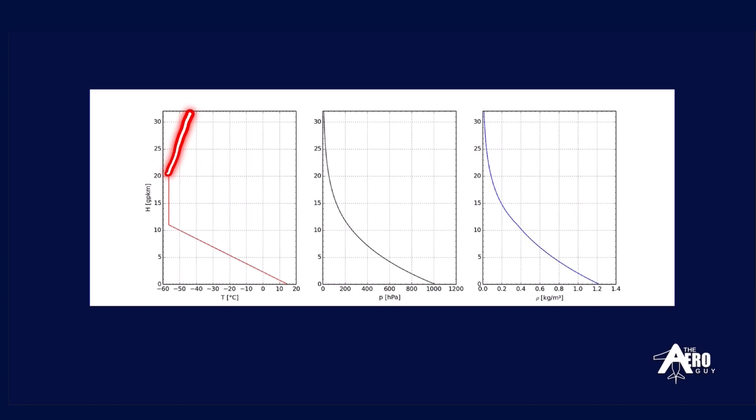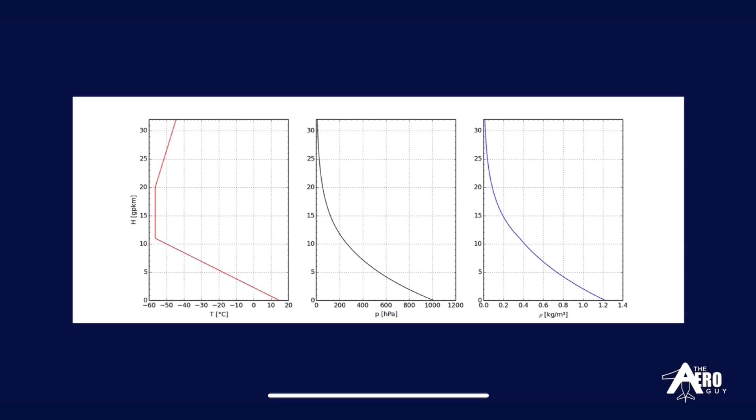Now let's take a look at the overall trend of temperature with altitude. If you analyze the standard atmosphere, you'll notice a distinct pattern with temperature change as altitude changes. At sea level, again, temperature decreases as altitude increases. At around 11 kilometers, temperature becomes constant and remains steady for some distance.

Now beyond this point, temperature starts to increase again, pauses, and then decreases, and then pauses, and then at the last layer, it increases even further. Now we will not discuss the reasons for these temperature changes in this video, as that's another rabbit hole to dive into, but maybe for another time. But just a quick introduction.

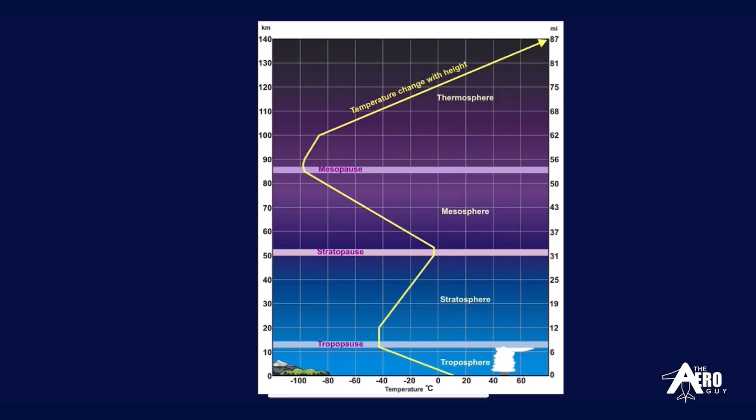The significant temperature changes define each layer of the atmosphere. And each pause in such significant change defines a transition from one layer to another. With this understanding, the unpredictability of temperature with altitude becomes slightly predictable by breaking the atmosphere into layers.

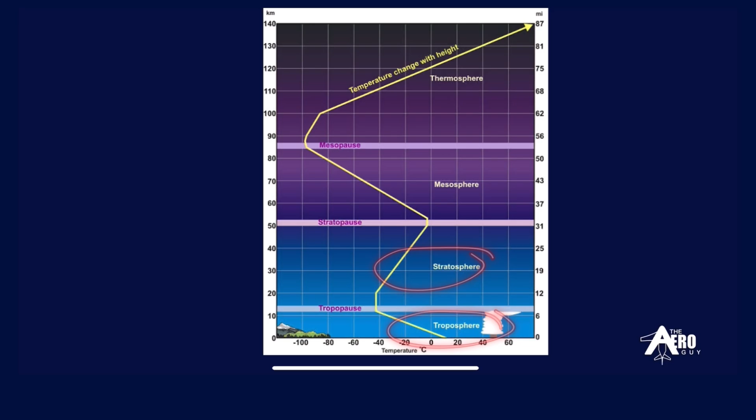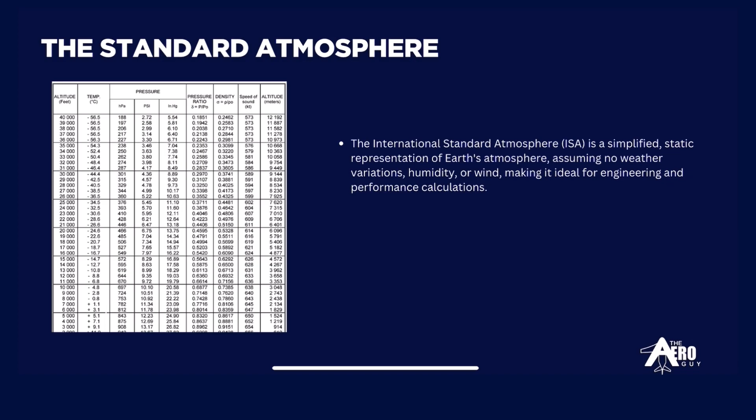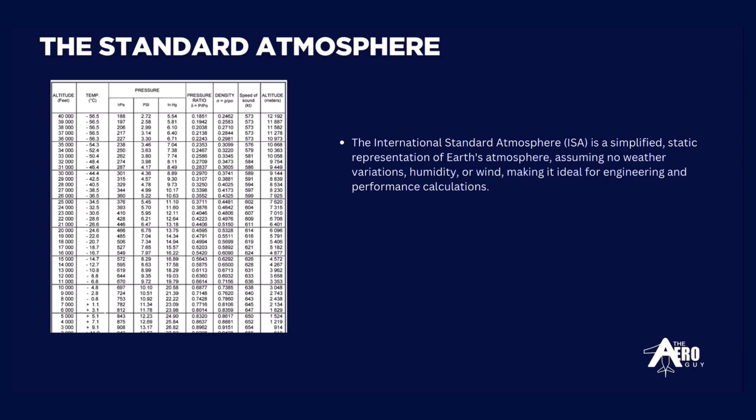Based on temperature behavior, we can define standard values of temperature with altitude, which serve as the foundation for modeling the atmosphere in aviation and aerodynamics. So let's continue working with temperature as it changes with altitude to define an equation for our modeling of the atmosphere. Let's look at this graph.

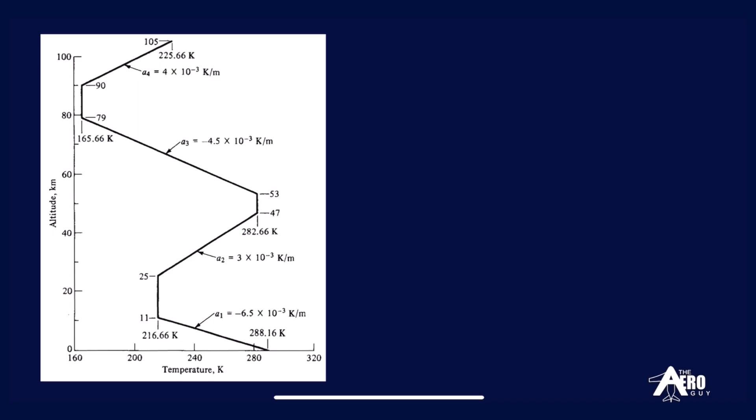And after the tropopause, there is an increase of temperature with altitude, and the rate of that change is given by this value. And with that, we may be able to use such trends to define the standard temperature for our standard atmosphere. However, we cannot use this graph as it is presenting data in a way where altitude changes per temperature change. Instead, we need to interchange the axes to better visualize how temperature varies with altitude.

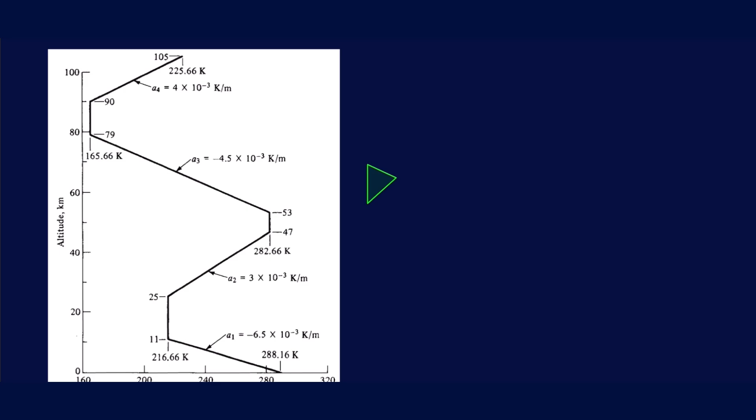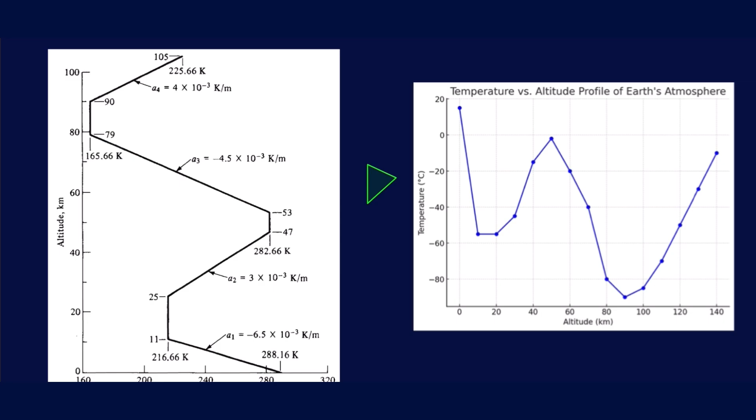So, by setting the y-axis as temperature and the x-axis as altitude, we restructure the graph to clearly show how temperature behaves at different altitudes, making it easier to interpret and apply in our atmospheric modeling. So now let us derive an equation to express how temperature changes with altitude.

For modeling the atmosphere, we will be utilizing this visualization of temperature change with altitude, but I've included this graph just to get the trend of how temperature changes with altitude for each layer. But for our derivation, we will be starting at the first layer, which is the troposphere. And then later, we'll look into deriving an equation for the tropopause.

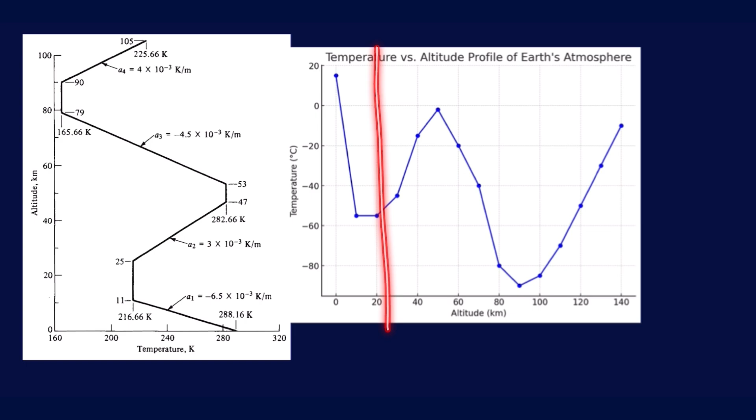Okay, so to start that, let us simplify this part of the graph for our analysis. Allow me to draw another graph. And let's express temperature in terms of Kelvin for engineering calculations.

Again, in the troposphere, as we increase the altitude, temperature decreases. So the trend would look like this one. At sea level, temperature decreases with altitude to a certain value. Okay, so we basically created a line with 2 points.

And with that line, our analysis for temperature and altitude can be simplified using basic algebra. In particular, we will be able to use the equations of a line. And to be specific, this equation.

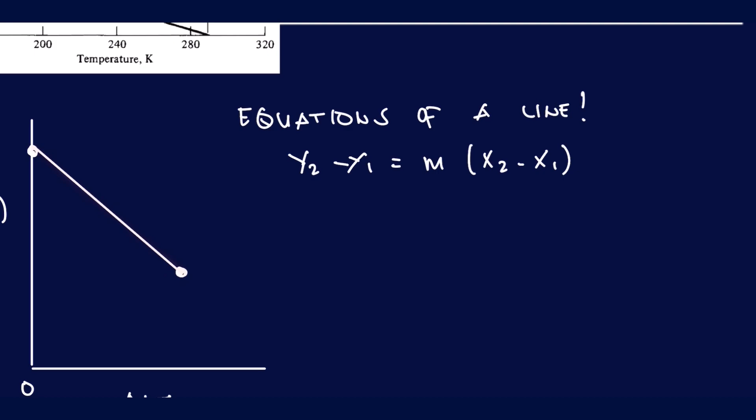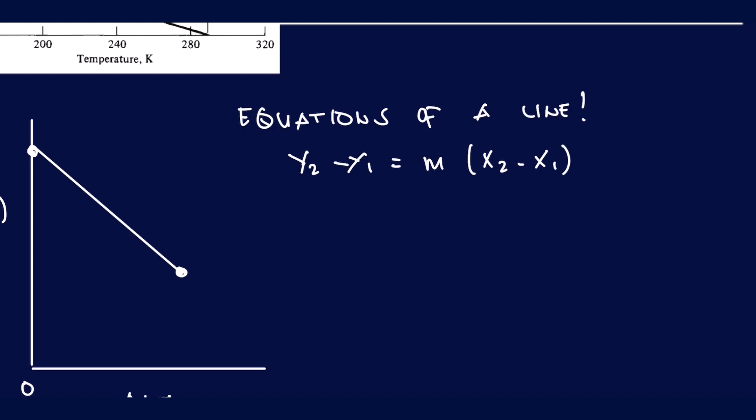Why? Simply because temperature varies linearly with altitude. And if we know any 2 points along this line, we may be able to define each temperature with altitude at the standard atmosphere and at the tropopause. And good thing, we gathered enough data to determine the temperature at sea level and at 11 kilometers.

Now, what are these temperatures again? At sea level, the temperature is at 288.16 Kelvin. That's roughly 15 degrees Celsius. And at 11 kilometers, the temperature is at 216.66 Kelvin. Convert it to Celsius yourself.

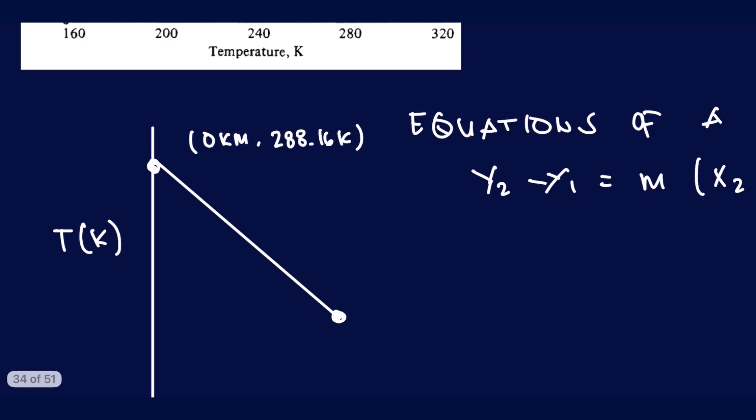Now, let's define those points. At sea level, at 0 kilometers, the temperature is 288.16 Kelvin. And at 11 kilometers, the temperature is 216.66 Kelvin.

Okay, so we basically defined 2 points along our line, and we will use such data to determine an equation for temperature variation with altitude. Again, the general equation to use is just an equation of a line. And we have defined y2. We also have y1. M is our slope. We have x2. And we have x1.

Let us try to define the slope in this point. The slope is just the change in rise over the change in run. Basically, it's a difference between y2 and y1 divided by x2 minus x1. Do we have that data? Yes, we do. So we can solve for the slope.

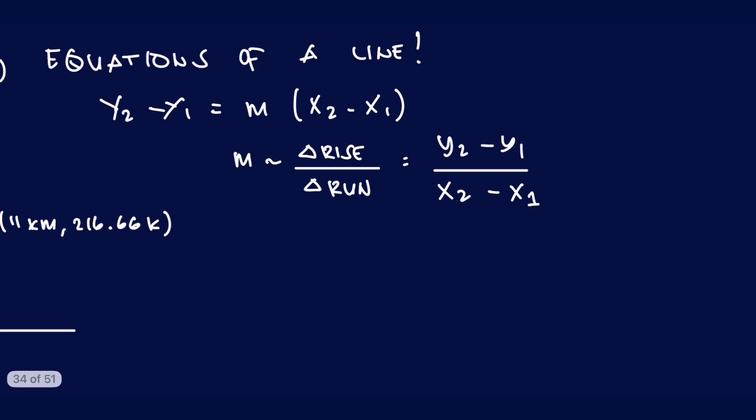So the general equation is: y is our temperature, that's temperature 2 minus temperature 1, equals the slope multiplied by the altitude, that's height 2 minus height 1.

Now I'd like to change this slope into a more appropriate symbol. We use the symbol lambda, or we can use A by convention to define the slope. Okay, we also have a name for such slope. We call it the temperature lapse rate.

The slope defines the trend, and the temperature lapse rate defines the trend by how much the temperature changes with a change in altitude. So since we have values for y2 and y1 and x2 and x1, we can figure out the value for the lapse rate. So how do you compute for that? The lapse rate is equal to y2 minus y1 over x2 minus x1.

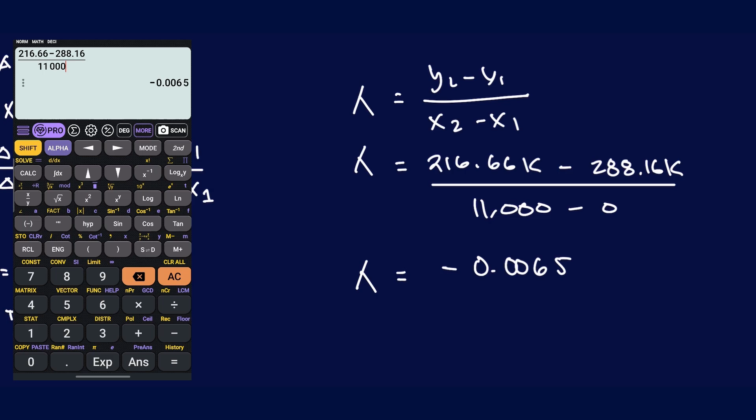Now, let us input the data in our calculators. We get the lapse rate y2 minus y1 over x2 minus x1. That's 216.66 as our y2. y1 is 288.16, and 11,000 minus 0, that's just 11,000 meters. We get a value of negative 0.0065. And there you have it. That's your temperature lapse rate. That's negative 0.0065 Kelvin per meter. And you can convert this to appropriate unit as needed.

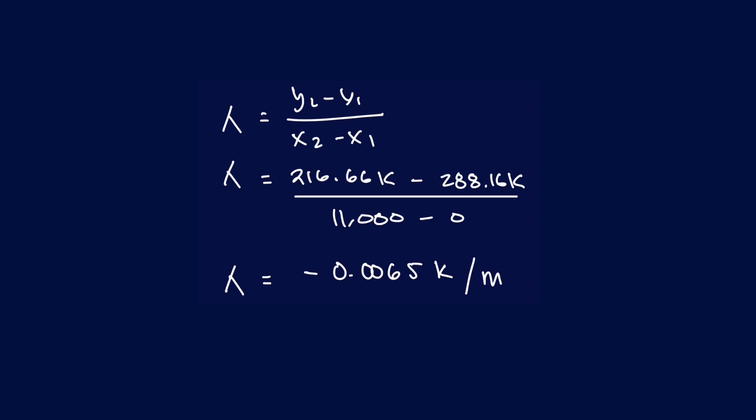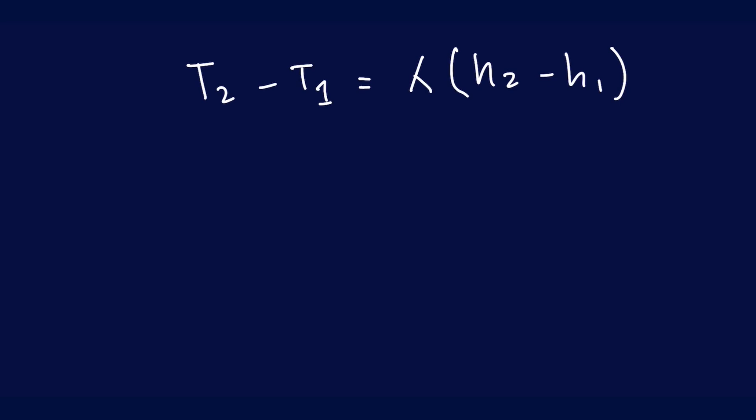Again, let me write that down. That's temperature 2 minus temperature 1 gives us the lapse rate multiplied by height 2 minus height 1. This is now your equation for temperature variation with altitude. And again, the lapse rate value is negative

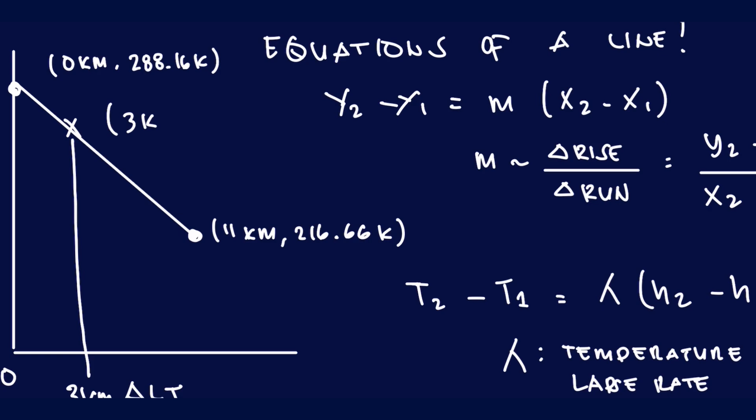0.0065 Kelvin per meter. So this equation is highly useful, as again, this makes the computation for temperature change with altitude predictable. With this equation, you may be able to figure out what is the temperature at a certain altitude. Let's say you were asked for the temperature at 3 kilometers. Just substitute the knowns. You know the temperature. You know the altitude to be at 3 kilometers. And you're looking for the temperature.

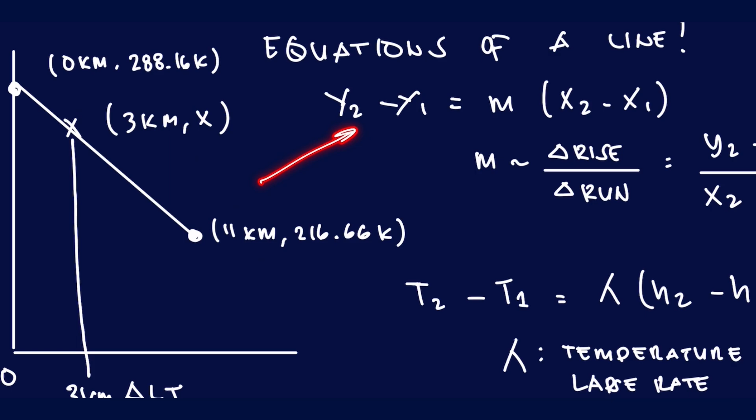Since you have 2 points along a line, just use this final equation. T2 minus T1, you're looking for the new temperature. You already know your sea level temperature. You already know your lapse rate. And you know the height that you're comparing.

And now let's move on to another property that describes the atmosphere. You have the pressure. Unlike your temperature, pressure is relatively straightforward. There is an exponential decrease of pressure with altitude, and we've already started to derive a general equation for pressure change with altitude through the hydrostatic equation that we derived in the first video. So with that, let me write down the hydrostatic equation considering geopotential altitude. Again, this equation relates the change in pressure with the change in altitude.

So, how do we make this equation useful? We will be utilizing mathematical tricks by substitution, and eventually we'll go over some integration just to derive a usable equation. So without further ado, allow me to begin deriving by dividing both sides by P.

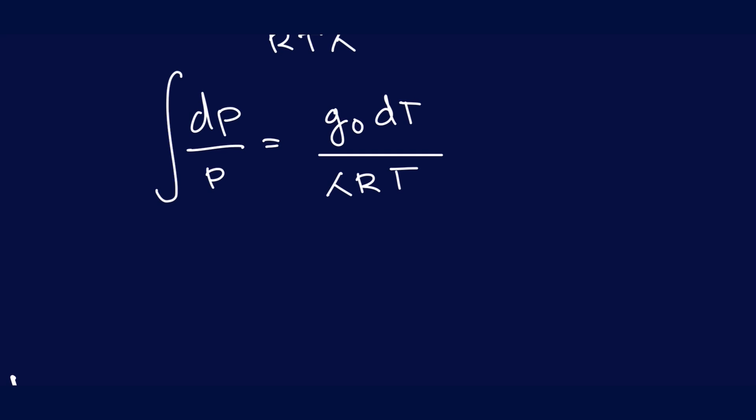Since we have a differential equation, let's make this whole by integration. We will now integrate the two sides of the equation. With the first side, the limits are from pressure 1 to pressure 2. And on the other side, the limits are temperature 1 and temperature 2.

So by rules of integration, we get ln P2 over P1 equals, since these three are constants, we let them out prior to integrating, temperature 1, temperature 2. We get g0 over lapse rate times R, ln T2 over T1.

And to remove ln here, we exponentiate. And now we get a final equation describing the pressure change with altitude, described in terms of temperature change. This equation is what we call the pressure ratio equation.

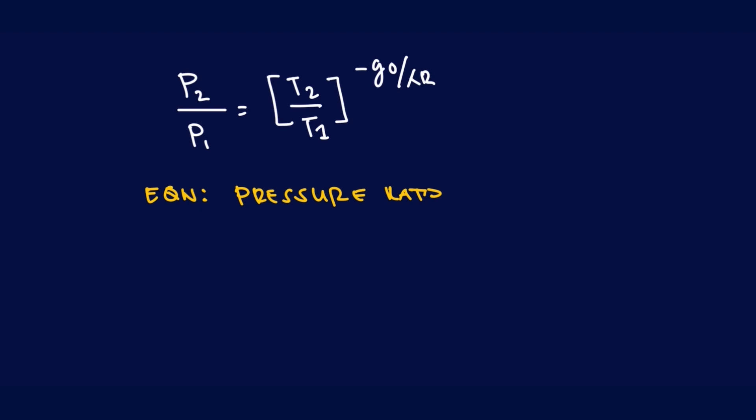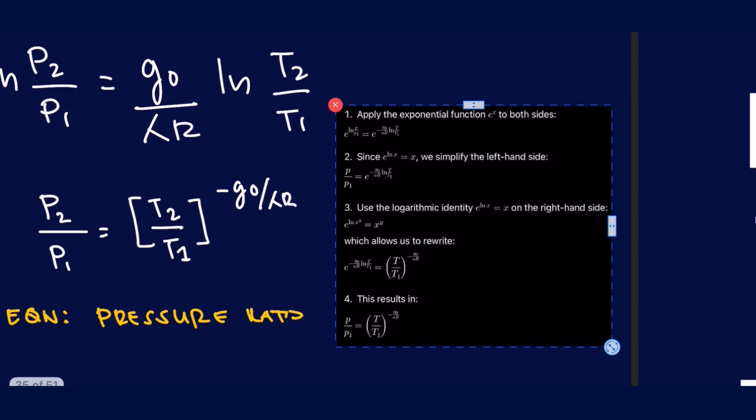And if you're interested in the steps of how we arrive from the equations above to this equation, I have outlined the steps on this side of the screen. And as for density, again, from the previous video, density decreases with altitude, similar to pressure. With that said, we can use the equation for pressure to derive an equation for density change with altitude.

From the previous slide, we derived an equation for pressure change with altitude through temperature changes. And we'll do the same for density this time. By the equation of state, pressure is equal to density, gas constant times temperature. Substitute this for both pressures.

So we get density 2, R, temperature 2, divided by density 1, R, temperature 1, equal to T2 over T1 raised to negative gravity at sea level over lapse rate times R. Cancel out similar factors.

You're left with density 2 over density 1 multiplied by T2 over T1 is equal to T2 over T1 raised to these factors. And transferring T2 over T1 to the other side, we get density 2 over density 1 equals this term raised to this, minus 1.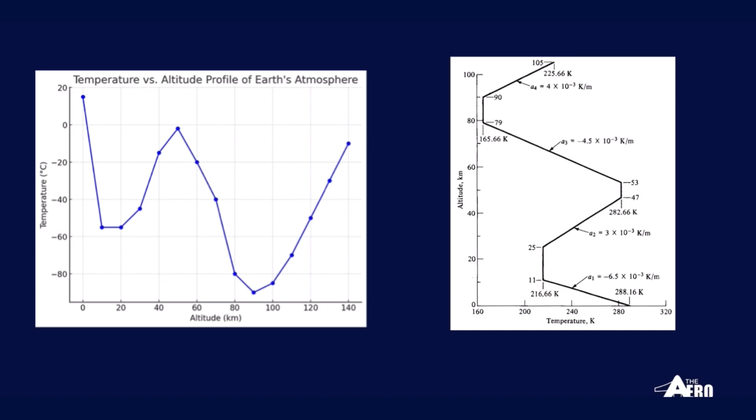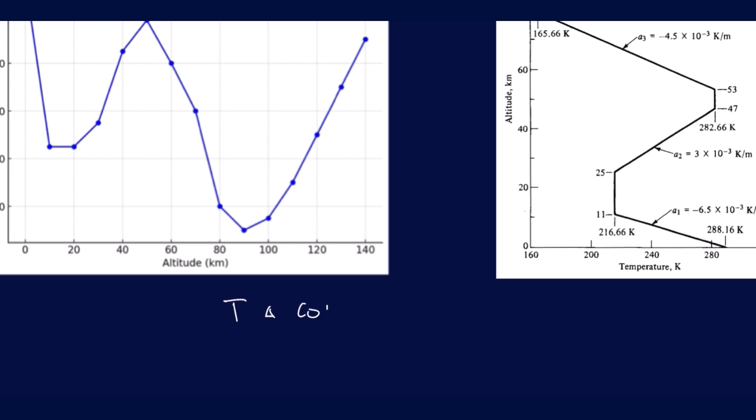So, look at the tropopause at 11 kilometers to 25 kilometers. In that region of the atmosphere, the temperature is constant. Meaning to say, if you solve for the lapse rate, there is no change in temperature.

Meaning to say, there is no equation required to compute for the temperature change with altitude. So what is the value of temperature at the tropopause anyway? The temperature at the tropopause is at 216.66 Kelvin.

So now let's talk about pressure changes with altitude at the tropopause. Now, unlike your temperature, which remains constant at this region of the atmosphere, pressure does not do this at all. It maintains its decrease with altitude. And we cannot use the same equation as that of the troposphere, as those equations involve temperature changes. So this time, let us derive an equation that can be used for the tropopause. So, with that, we have the hydrostatic equation. Again, this describes the pressure change with altitude. We derived this in the previous video.

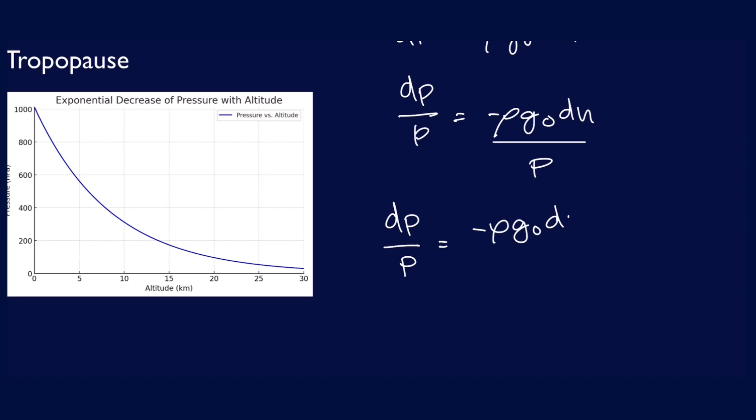And let us divide both sides of the equation by pressure, and substitute pressure on the right side of the equation by the equation of state. And here we cancel out the common variables and we continue: g0 dh over RT. Then we integrate this to make this equation whole and to make this equation usable.

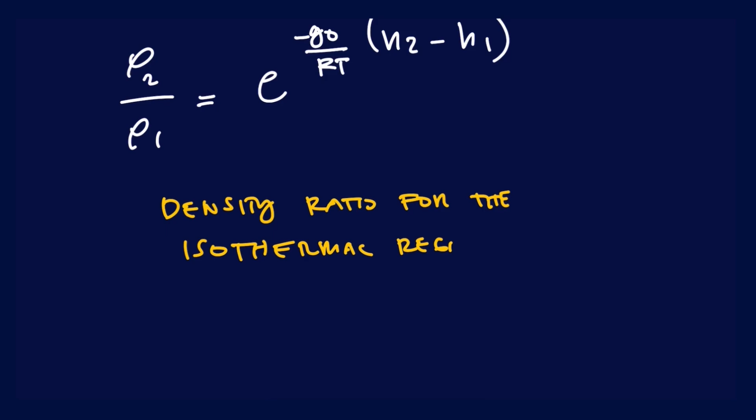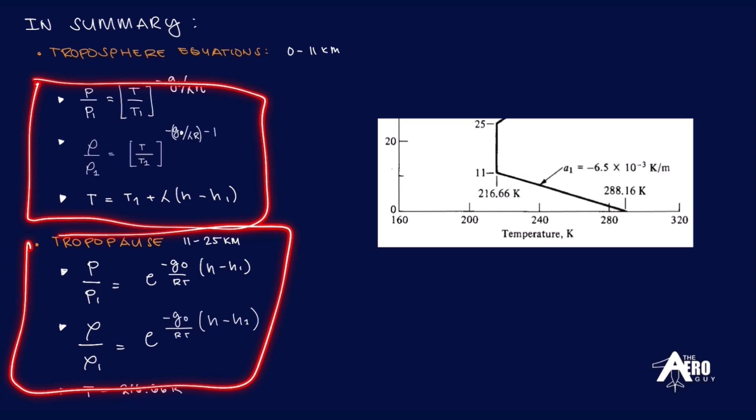Now that we've gone through the derivation of equations of how pressure, temperature, and density change with altitude, let's summarize what we've established. Again, these equations describe how atmospheric properties behave as altitude increases. We specifically derived them for the troposphere and the tropopause. However, these same equations can be applied to both gradient and isothermal regions of the atmosphere, making them useful beyond just the troposphere and the tropopause, enabling us to model and to derive values for a standard atmosphere.

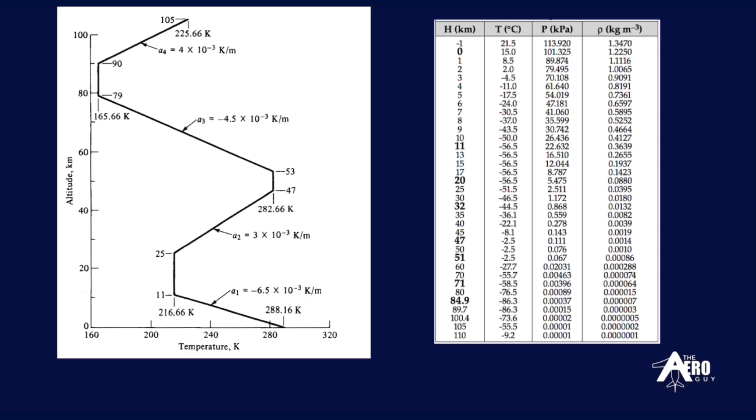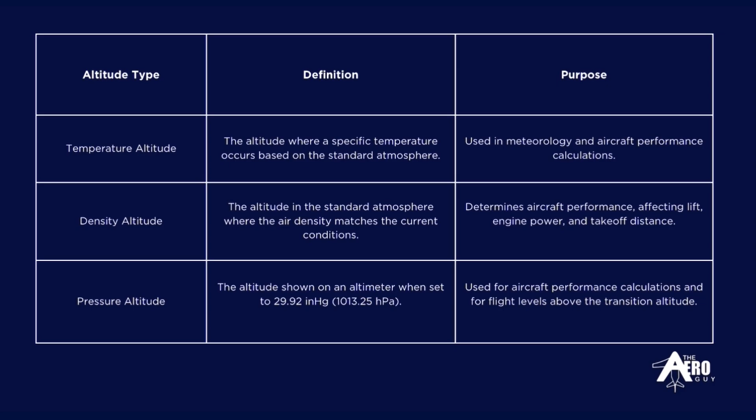And to help with the application of these equations, I've provided a table that defines different altitude names based on whether we're using temperature, pressure, or density to determine altitude. And this table will give you a clearer understanding of which equation to use in specific cases, as I've provided a column describing the purpose of that altitude. So for temperature, we call it temperature altitude. This is the altitude where a specific temperature occurs based on the standard atmosphere. This type of altitude is mainly used in meteorology and aircraft performance calculations.

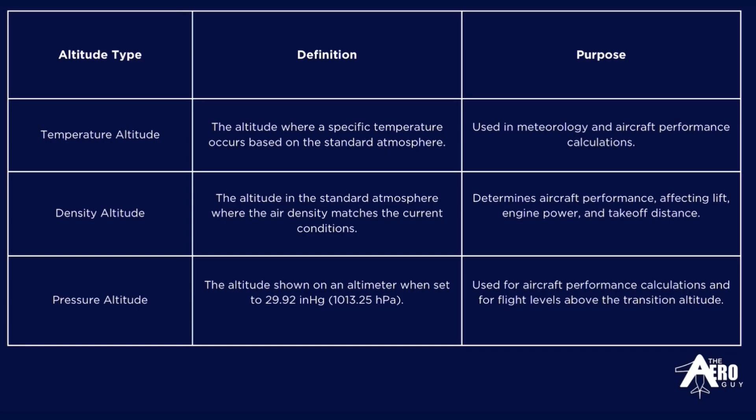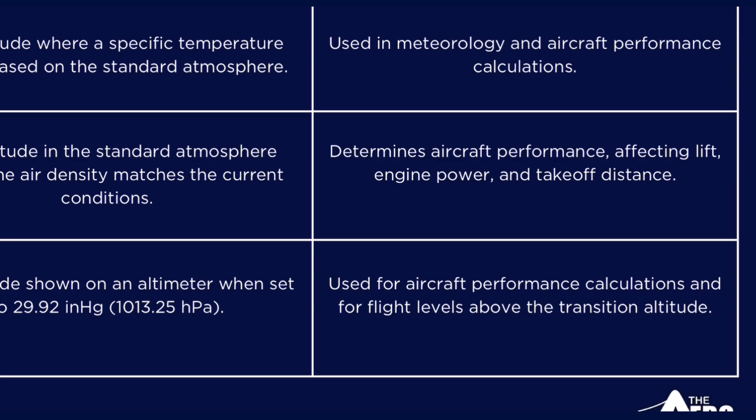We also have density altitude that can be used for aircraft performance computation, affecting lift, engine power, and takeoff distance. And we also have pressure altitude. This is very common in aircraft manuals. This is also used for aircraft performance calculations and for flight level above the transition altitude. And now that we have a solid mathematical foundation of the changes to properties with altitude, we can explore how these equations are applied in real-world scenarios.